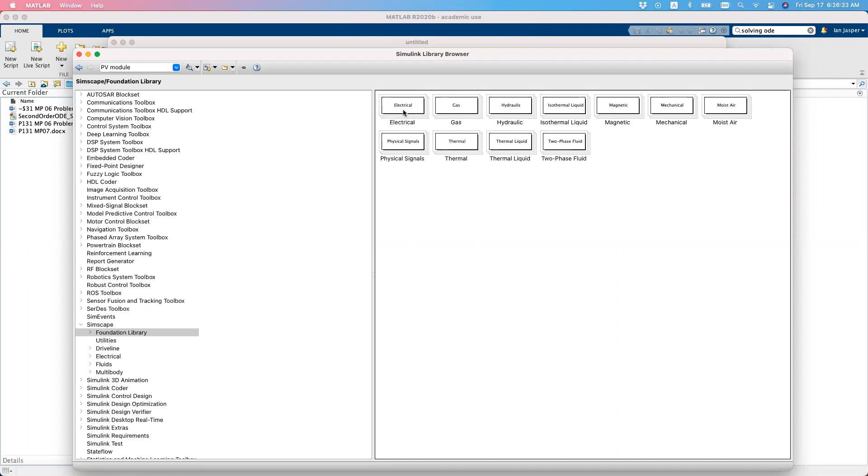Okay, sabihin nyo lang kung ano, kung gusto nyo ipaulit. I'm sorry, Simscape. Foundation library pala, foundation library and then electrical, and then electrical elements. Okay, so dito makikita niyo na yung mga capacitors, diodes, and so on and so forth.

Okay, so it's as easy as, kung magko-cooperate yung computer ninyo, it will just be as easy as dragging yung electrical components. So let's try to build a network, resistor network.

Okay, this one. Minsan mas mabilis pag nagpa-paste ka na lang. Okay, so yeah, and then nalagay tayo ng...

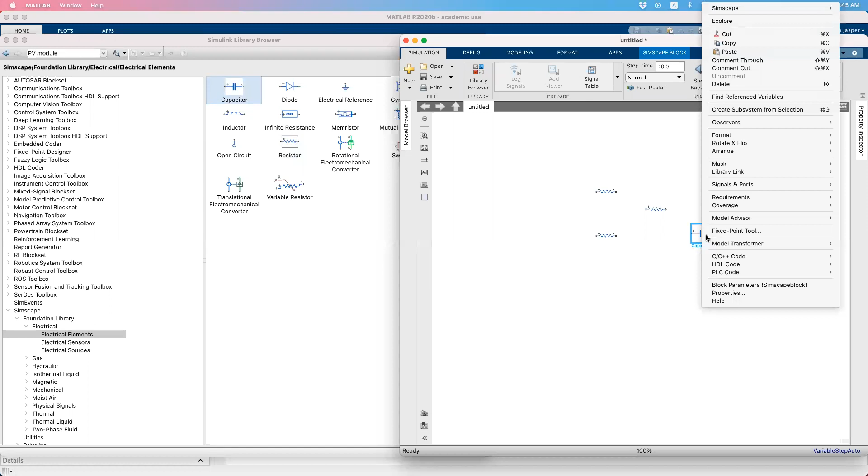Capacitor, pwede nyo i-rotate yan. So right-click, pag ni-right-click nyo yan, rotate and flip clockwise. Okay, and mapapansin nyo, may polarity din yung ano, no? May polarity din yung mga components.

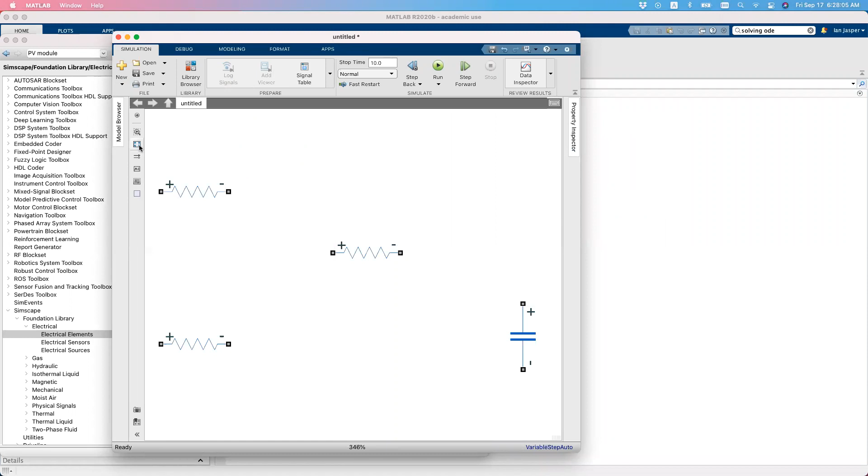So pwede natin zoom, yan okay. So may mga polarity yung components. Okay, so importante na mailagay nyo yung tamang polarity.

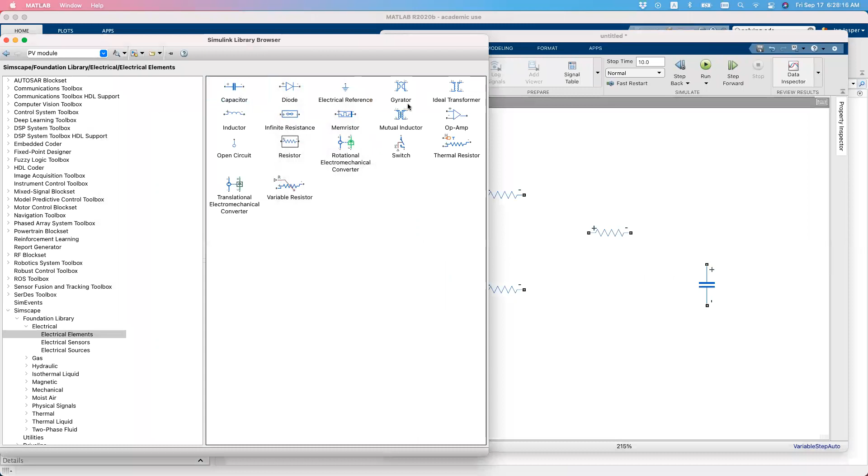And then, of course, kailangan natin ng power source. So we go back, we just click this button and then electrical sources, andito. So let's use an AC current source, AC voltage source.

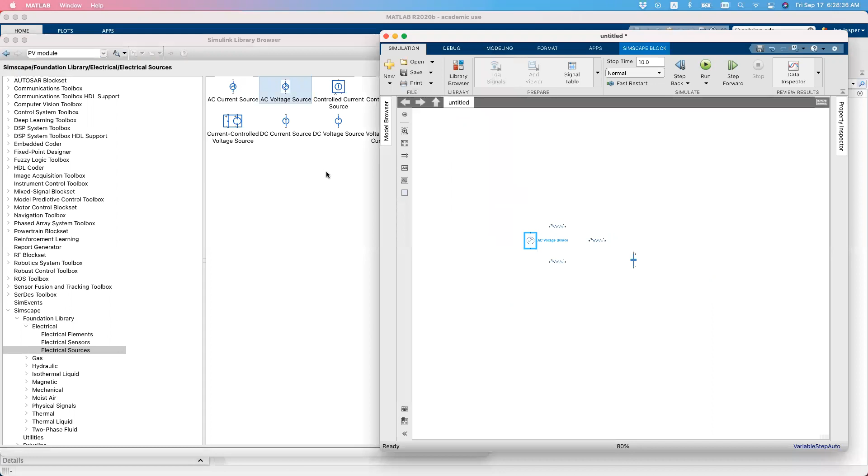Okay, so yan na yung mga ating components. By the way, kailangan din natin ng ground, electrical reference, lalagay din natin yan dito. So we only need one.

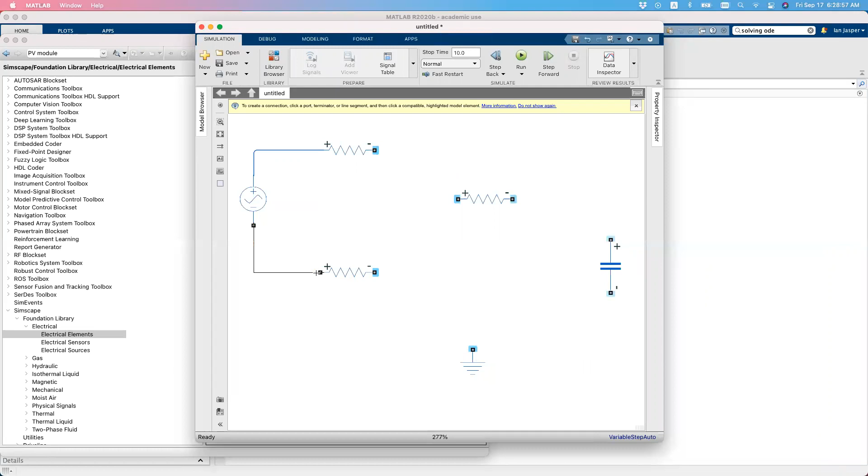Okay, so and then i-connect na natin yung circuits. It's just as simple as dragging, okay, ganyan. Okay, and then on, so of course, you can move this around kahit na naka-connect na sila. And then ito, oops.

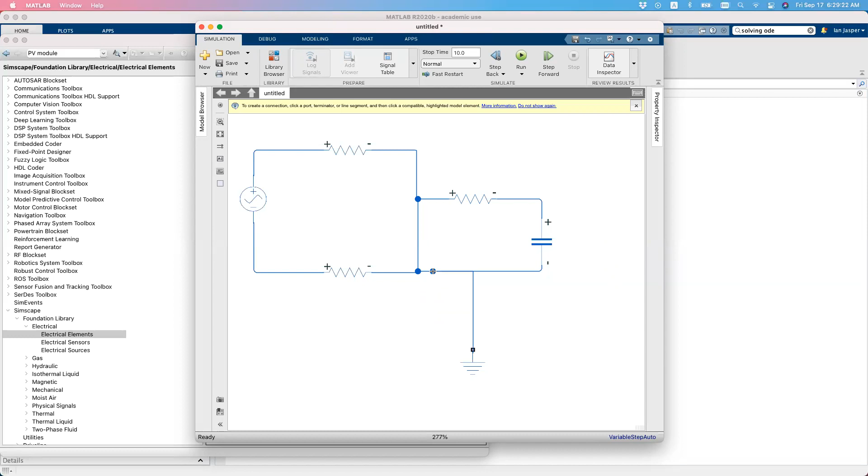Okay, and then of course, we need the ground. So if you see these nodes, these circles, that means they are connected. Okay, so now we have an electrical circuit.

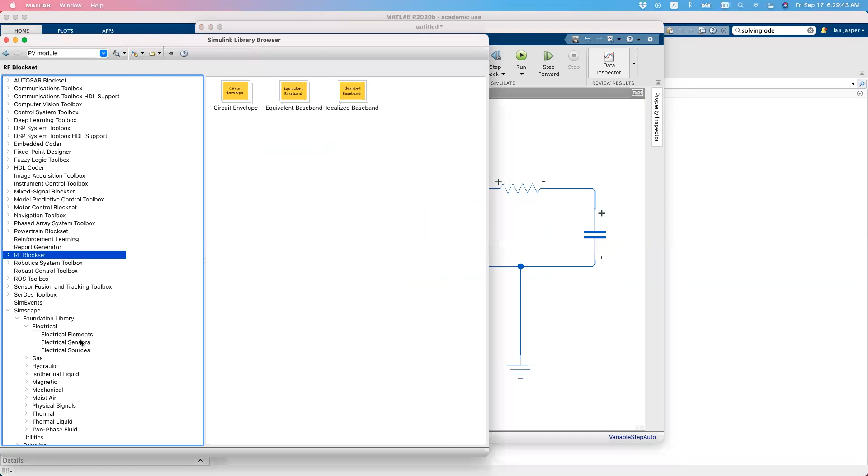So now we need to measure the electrical circuit. We go to sensors, and we can measure both current sensor and voltage if we want to. You can put as many voltage sensors as you like, or as many current sensors as you like. So let's put 2 voltage sensors. Zoom out. And you know that for current, they have to be in series.

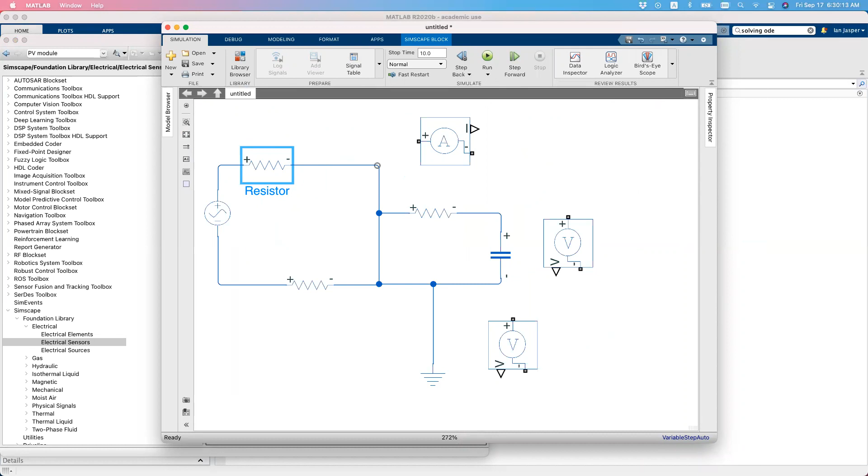So let's measure the current here. Let me delete this line, and I'm going to put it here, and then connect it. So our ammeter is now in series.

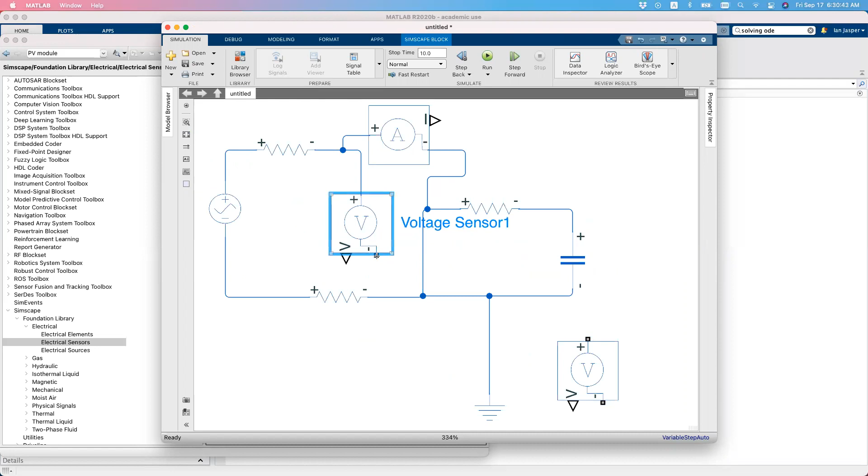And then for the voltage, let's put a voltage sensor here. Let's measure the voltage after the resistor, or here, at the output of the resistor. And then the second one, let's measure the output voltage here at the capacitor.

Okay, then we need something, a meter or a scope so we can see the values. Okay, so first we need to connect what is called the PS Simulink converter.

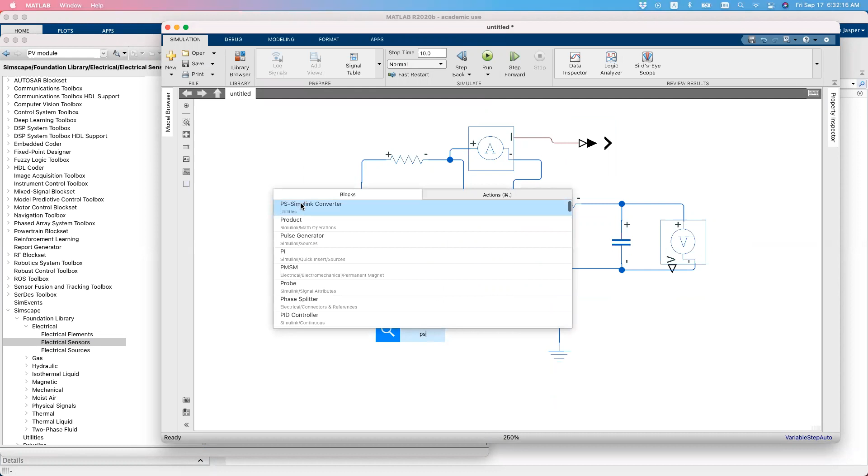So PS Simulink. Okay, what does this PS Simulink converter do?

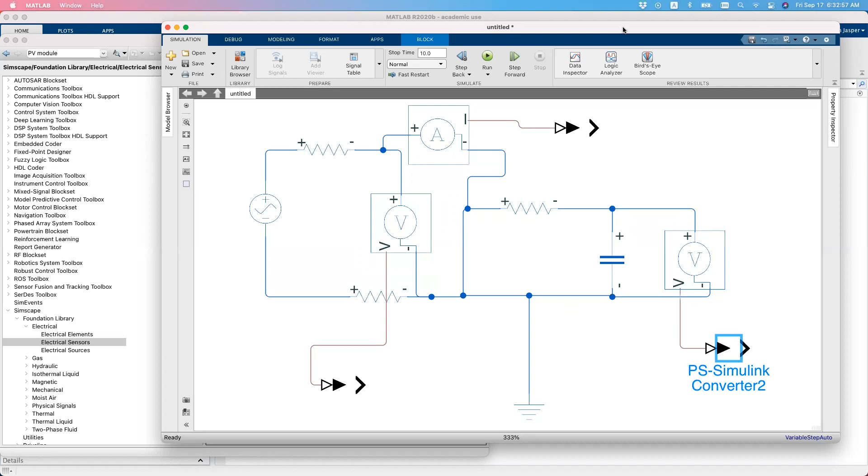Now, this circuit of yours is in some sense putting out an analog signal, and for the sensors in Simulink to read it, it needs to be converted into signals. So that's the PS, and then into Simulink, which is the software here. So it's a bit weird that they didn't connect it directly, but I guess it has something to do with their coding.

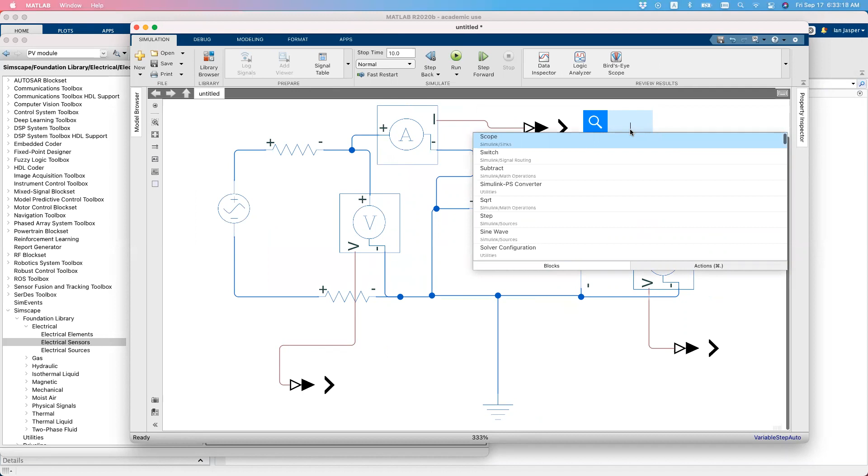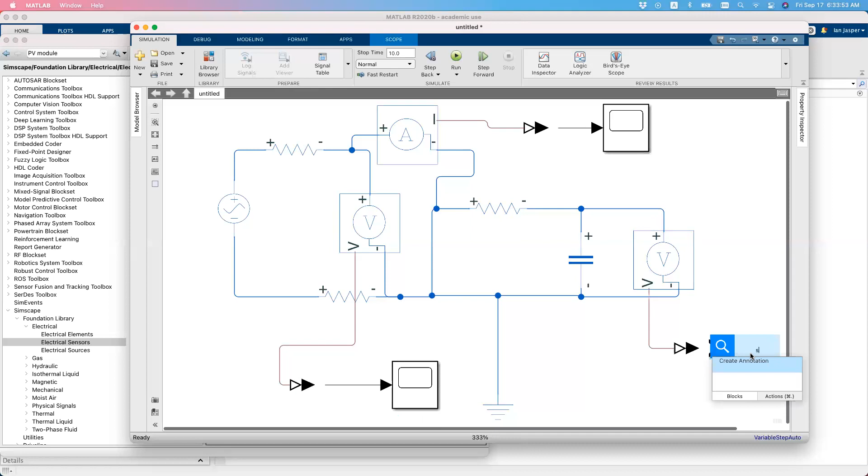Okay, so here. Then we need another scope here, and another one here. Okay, we can rename this scope. So this is an ammeter, and this one is voltmeter 1, and then voltmeter 2.

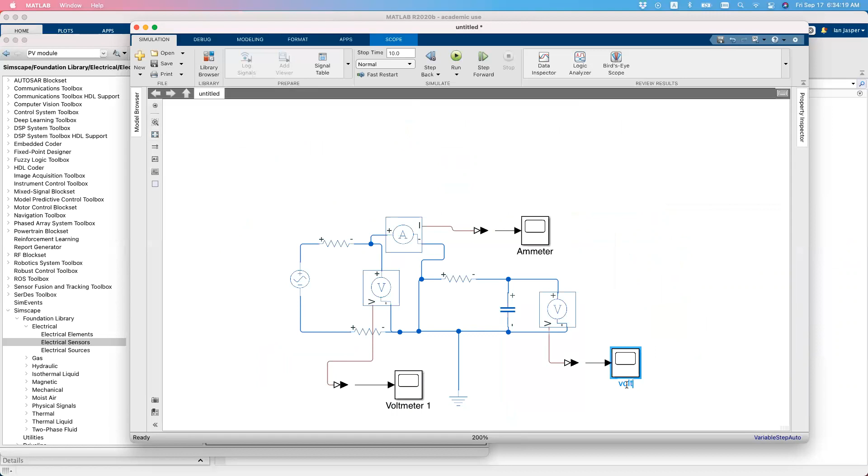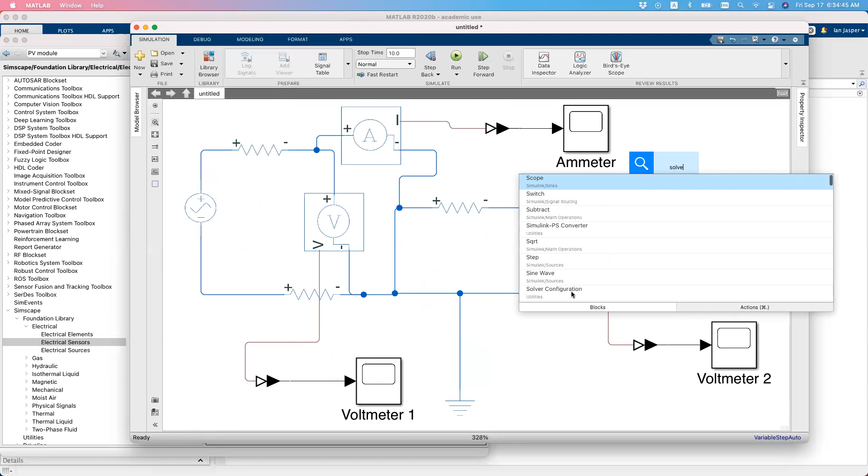Okay, and there's one more thing that we need, and that is the solver. Now this is mandatory when it comes to circuits, the solver configuration. So just put this anywhere, connect it wherever.

Okay, and that should be it. So now we are ready to run. Once you've built your circuit, you can run it. Just click run. Let's change the stop time, let's make it 10. It ran already.

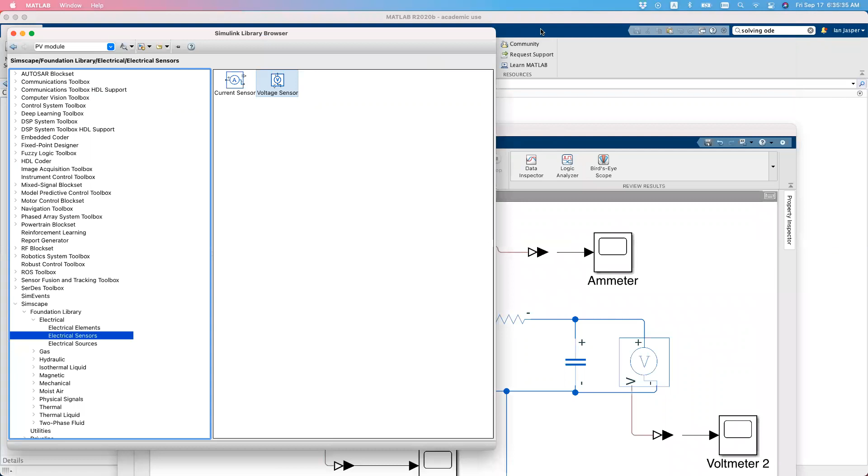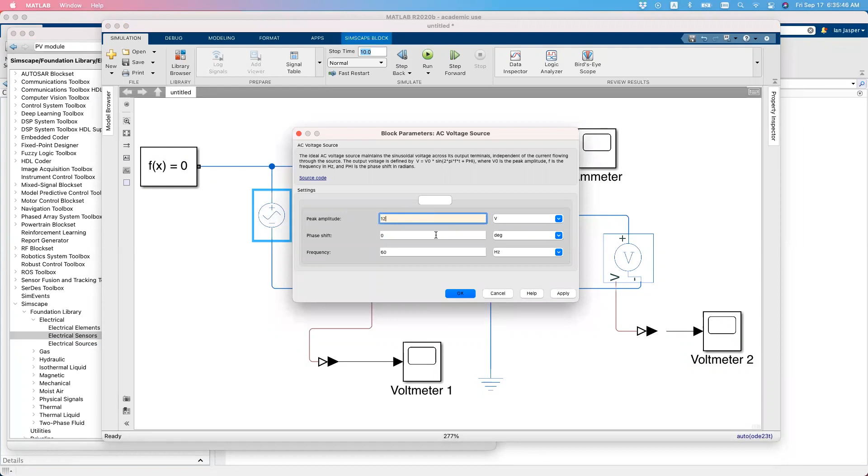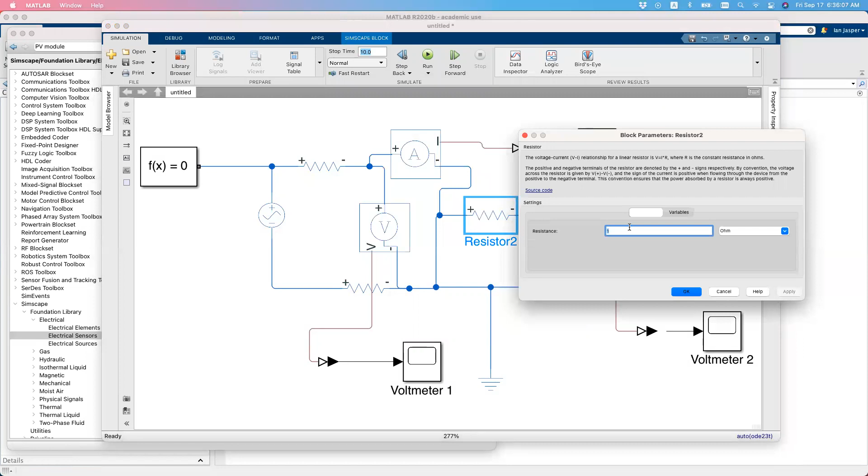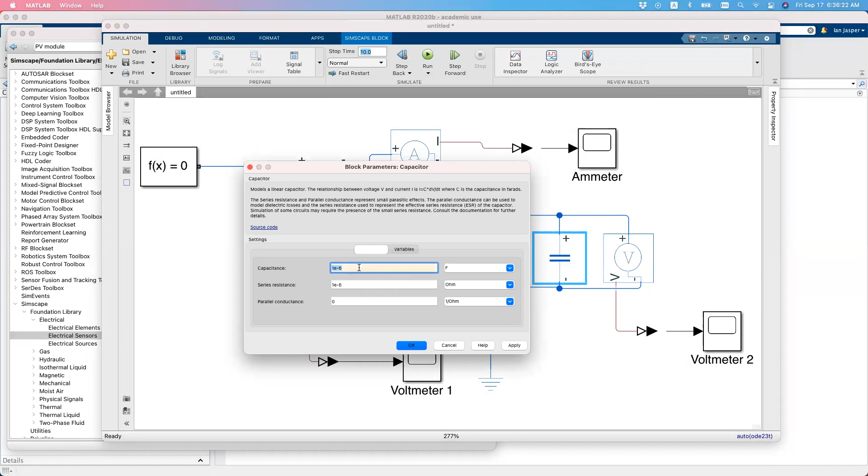Okay, so for example, here, double-click. 1 volt peak to peak, so let's put 12 volts, and then 60 hertz for the frequency. Okay, and then let's put values here. Default is 1, so let's put 1 kilo-ohm. Apply. And then this one, let's make it 2.2 kilo-ohm. Apply. And then this one, 100 ohms for example. And then this one, 1 nanofarad. Okay, 1,000 microfarad, 1,000 nanofarad, 1 microfarad. Okay, apply. Okay.

And let's change this to just 1 second. Stop time, that is. That means it will run from 0 to 1 second. Okay, then let's run this again.

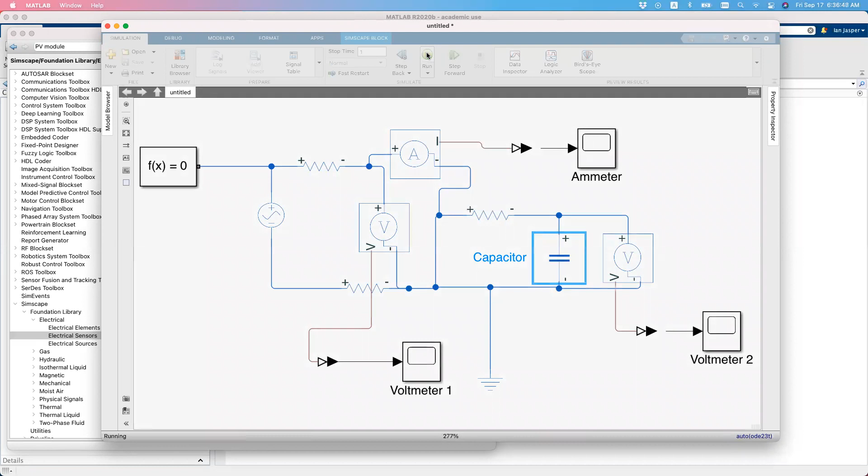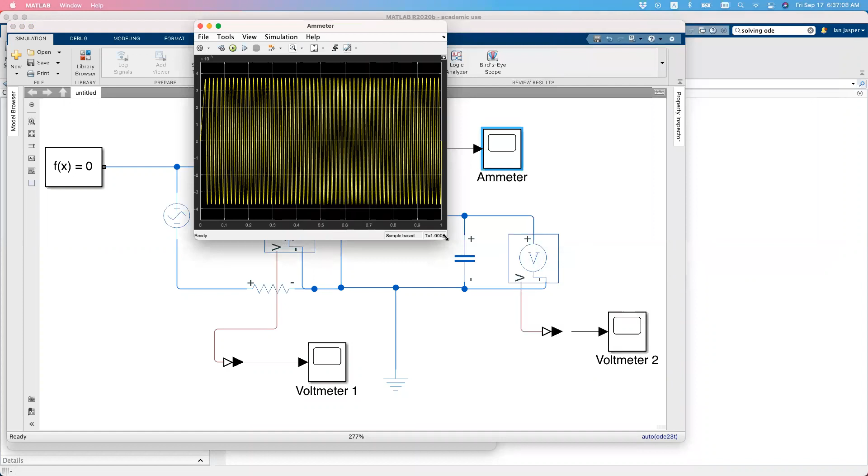Okay, and let's click on the ammeter. Double click on the ammeter. Okay, so we have this signal here from the ammeter. You can zoom that in, so if you want to zoom in just on this region, there, so you can see.

Extents, there, okay. You can also measure its values using this button here. So there are two bars here, 1 and 2, so you'll also see the corresponding values there. So this is the value of 1, this is the value of 2, at this point and that point. Okay, so you can move this.

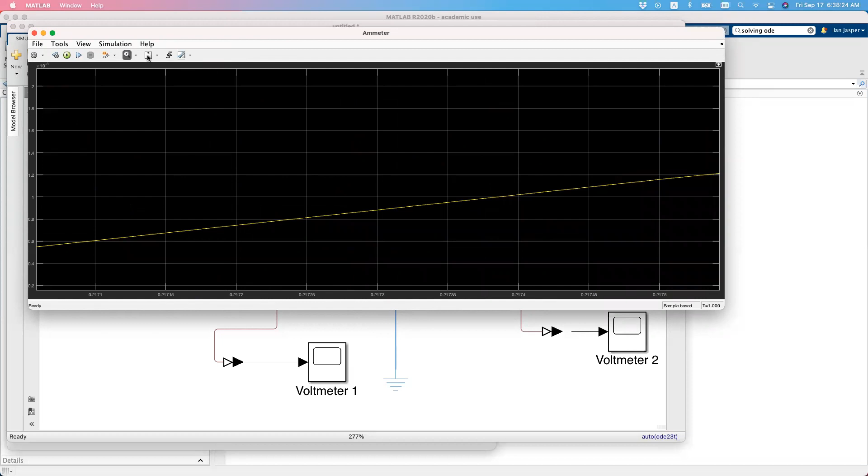Sorry, let's repeat. Let's zoom in again here. Okay, and then let's move this. Okay, the ruler disappeared. Okay, so let's move this now. I just need to remove this zoom here. So let's move this here.

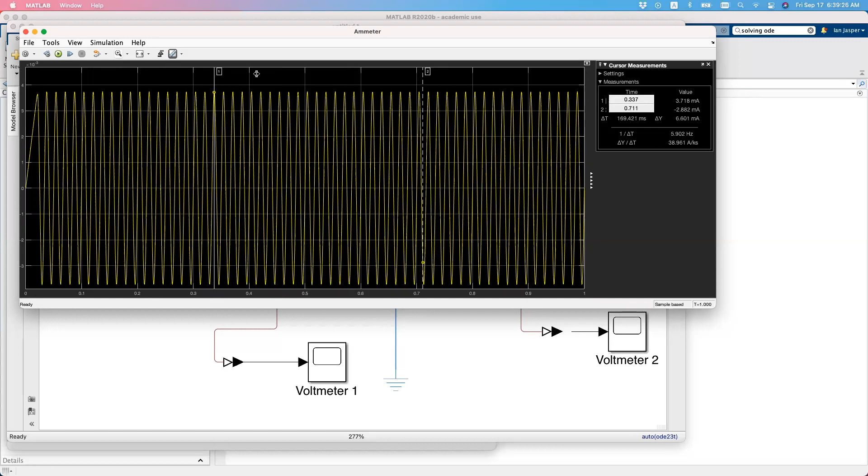And then you can do some other stuff here that you can play around with. Okay, let's try this, let's move it here a bit. And then this one, zoom it, zoom it. Okay, so you can find out, for example, the period. So, period is one. Yeah, like that. Okay, so this is one cycle.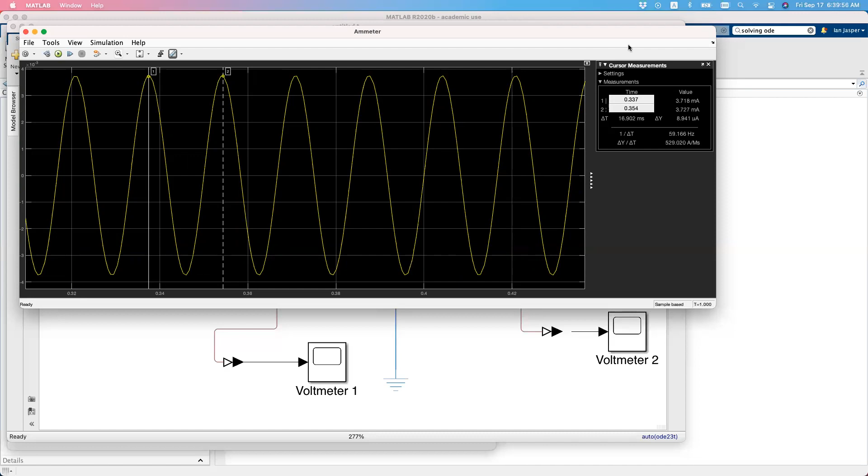Okay, and ito yung frequency niya. So, ito yung frequency which is 60 Hz, di ba? Yung sinet natin kanina dito is 60 Hz. So, AC voltage is 60 Hz. Nakalagay dyan, 60 Hz. Okay, so yun yung in-expect natin na frequency, di ba? Or 1 over period.

Okay, and then your amplitude is 0.337. Well, hindi actually yan yung amplitude. Yung amplitude should be with respect to zero value. Okay, so yeah, more or less yan yung amplitude. So, amplitude is 3.718 milliamperes, from here to there. Okay, yan yung value ng amplitude.

Okay, ito nasa microamperes lang siya. Hindi siya mailagay sa zero kasi may nakaset siya sa, anong tawag dito? Naka-step siya. Naka-snap to data. Hindi naman. Okay, yan, naka-snap to data siya. Oops, tanggalin na lang natin. As close as possible to zero. Okay, so yan.

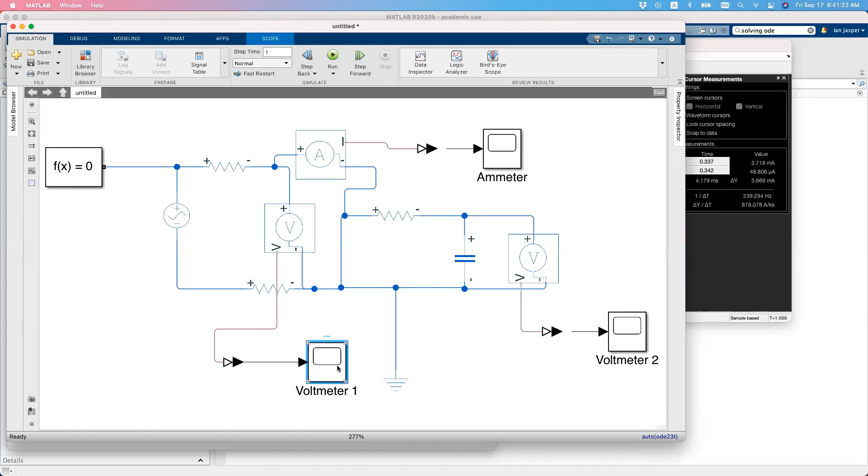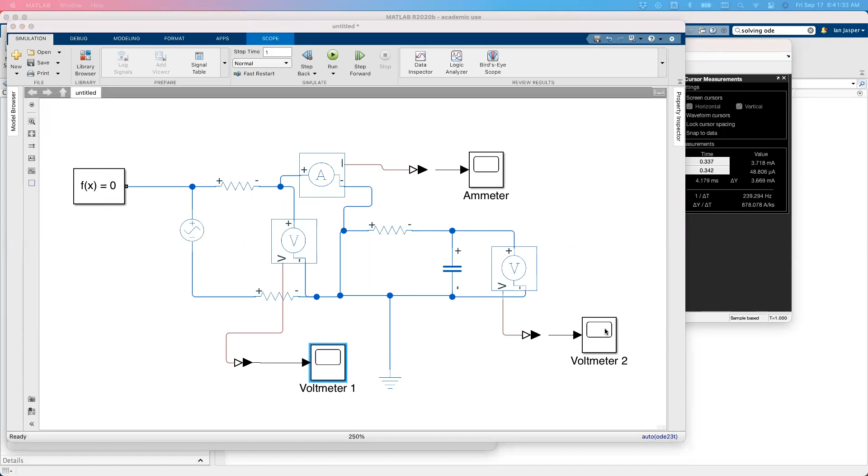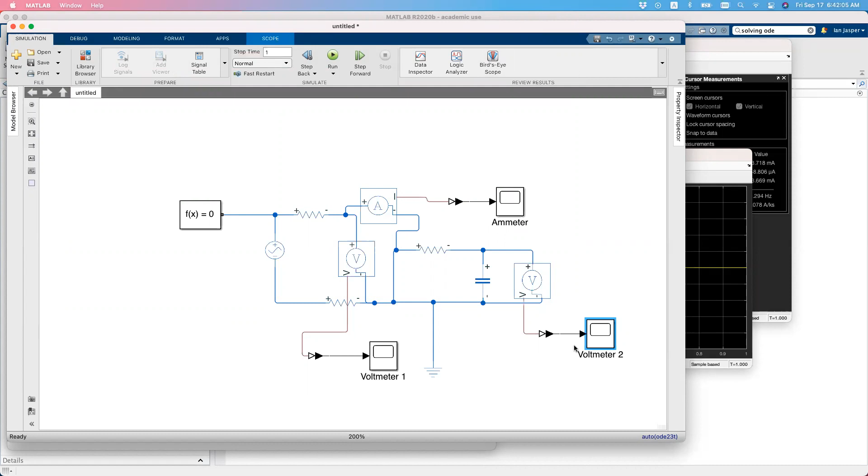Okay, and then ganun din para sa voltmeter 1, and sa voltmeter 2. Okay. Weird. Okay, anyway. Bakit wala siyang voltage?

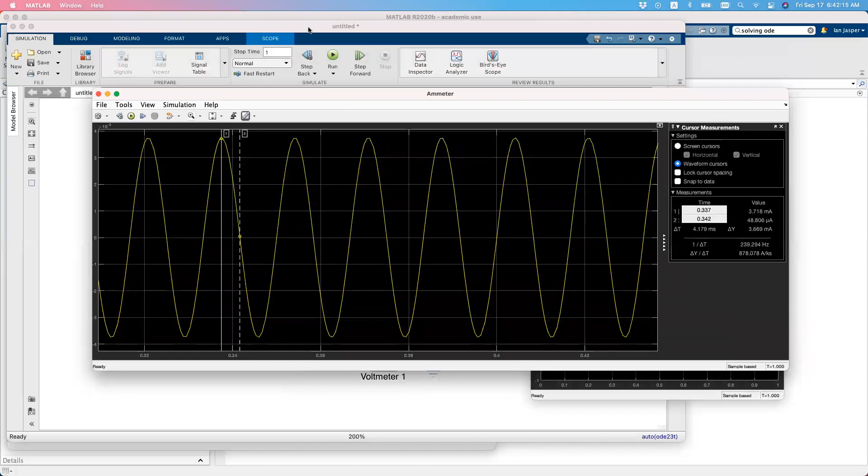Okay, anyway, so at least yan. So naipakita ko sa inyo kung paano gumamit ng Simulink. So once it's up and running, medyo madali na siyang anuhin. Now, you can import this, so pwede nyo i-print dito, pwedeng print to figure. Okay, at tawag dito, pwede nyo paglaruan din yung layout.

For example, hindi yan, view. Ito, configuration properties. So, time, yung display, so pwede kayo maglagay ng title, current versus time. Okay, so yung makikita nyo na lumitaw siya dito sa ibabaw. Okay, and pwede palitan nyo yung style.

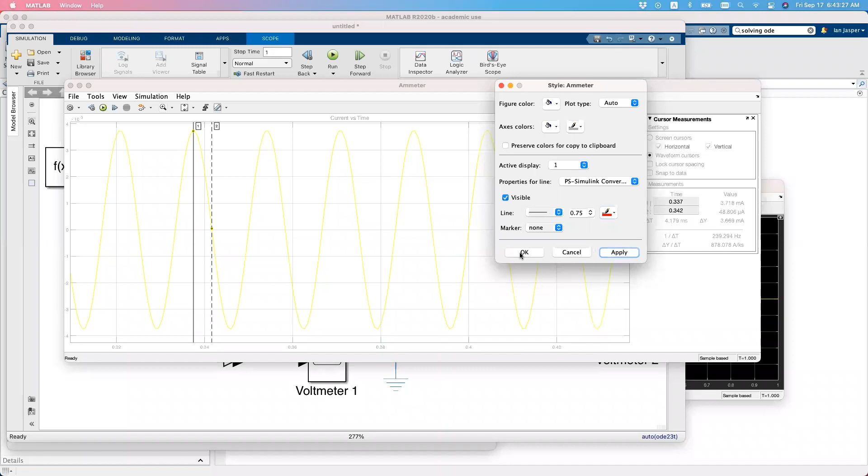So halimbawa, gusto nyo na yung figure color is puti. Yan, apply. Yan. Oops. And then yung axis color is puti din, and then apply. Yan, ganyan. Pwede nyo palitan yung kulay. Okay, so parang MATLAB lang din, di ba?

Okay, so and then yung simulation, can rerun it and so on and so forth. Then dito rin sa settings. Okay, so just when you start this, just play around with it. Tignan niyo kung ano yung mga features na available dito. Okay, at tawag dito yan.

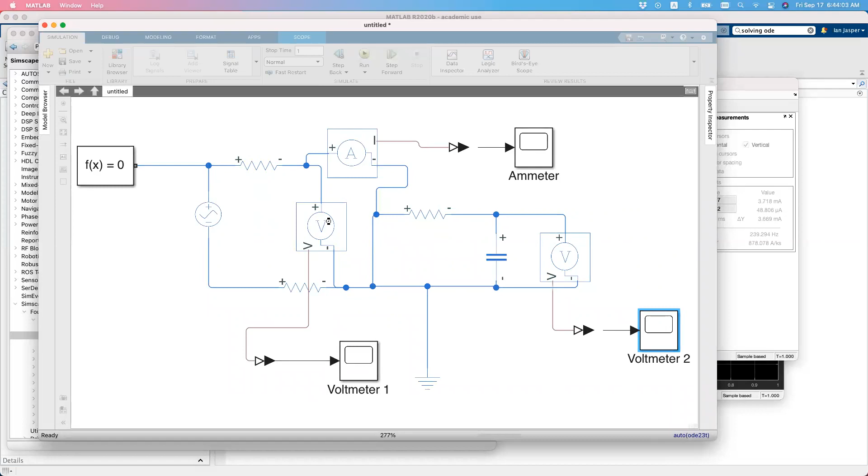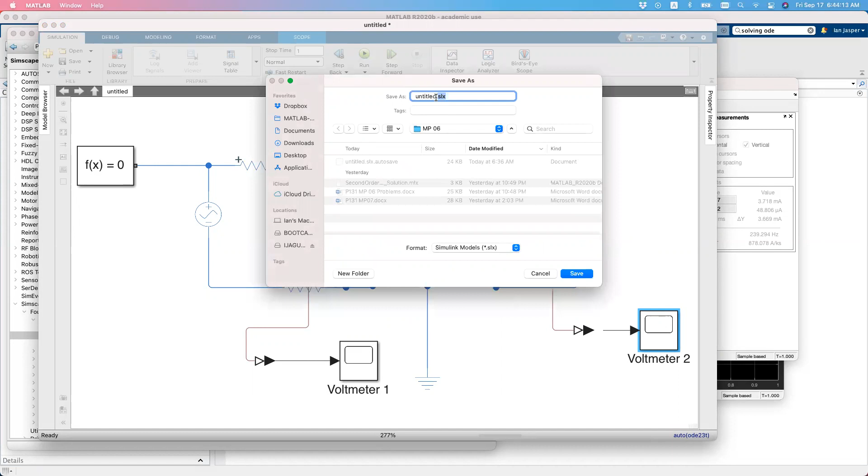Okay, then syempre kailangan nyo i-save it. So when you save it, it will be saved as an SLX file. Okay, so yan yung extension niya, SLX. Just type in your file name and then save it. Tapos yun yung isasubmit nyo sa akin. Okay.

Okay. So, any questions at this point? Walang questions, okay lang. Okay, so ngayon, basically ganun lang yung gagawin ninyo sa ano.

So ang talagang magiging issue lang dito ay yung performance ng inyong computer. Okay, so any questions? So yan na yung para sa dito. Essentially yan yung experiment 1 ninyo, magbi-build lang kayo ng circuit. Try nyo i-build yung circuit and that's it. No need to analyze anything. It's just to build the circuit. Okay?